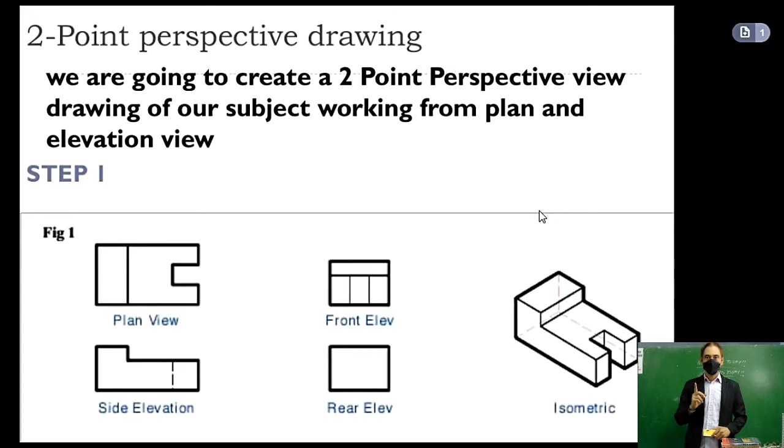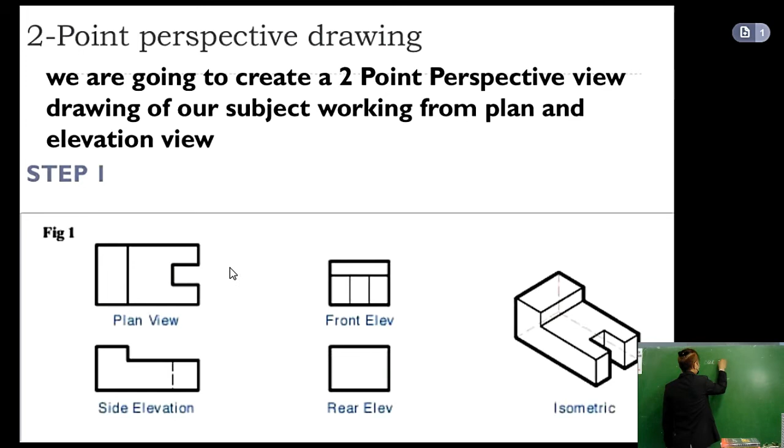Our topic for today is about two-point perspective drawing. We are going to create a two-point perspective view drawing of our subject working from plan and elevation view. Okay, so here are the steps. Step 1, we have here the plan view, side elevation, front elevation, rear view, and the isometric.

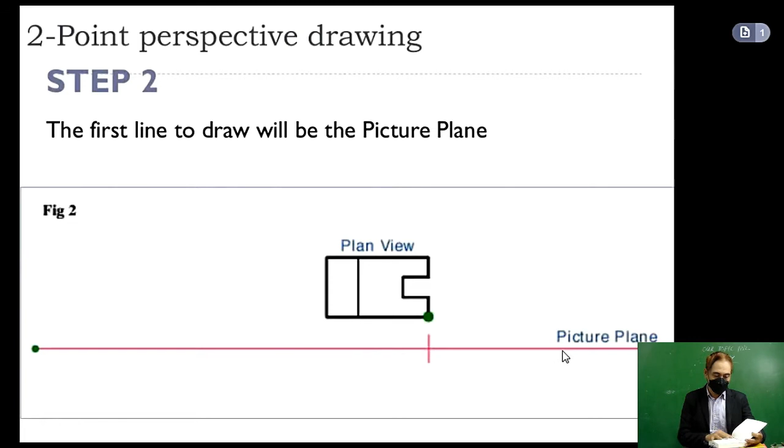Two-point perspective drawing, step number 2. The first line to draw will be the picture plane. Here is the picture plane in the pink line. And step number 3, place the lower right corner of plan view on the picture plane and rotate it clockwise. The choice is 30 degrees, arbitrary but should provide a good view.

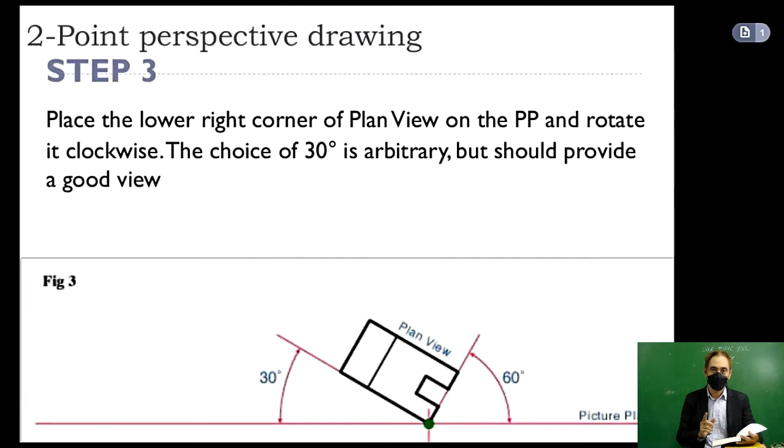So here is the 30 degrees. And the opposite side, it is 60. You should rotate your plan here. Okay. Now let's continue. Okay, now you draw your station point. This vertical line is called the station point.

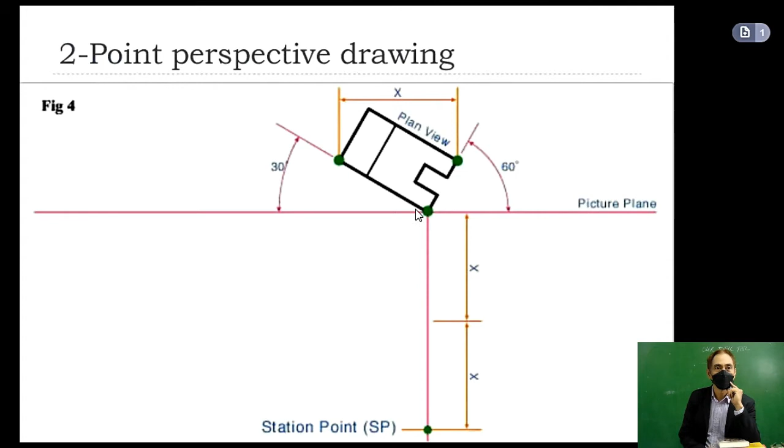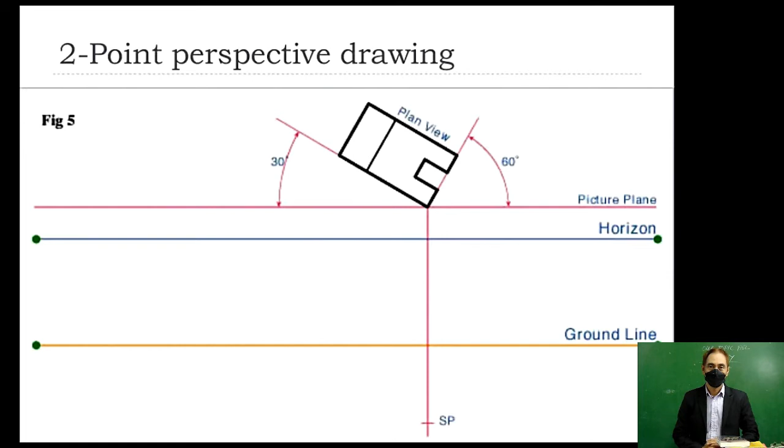And then you add now your ground line. This is color orange, and the color blue is the horizon. The ground line helps you where to put your perspective. Okay, so here is the ground line. So your side elevation must be put on top of the ground line.

And notice the station point. You will project a line going to the picture plane. That is 60 degrees, and 30 degrees going to the left. That is point A, and that point A will be projected down here in the blue, the horizon line, and this will be what we call vanishing point 1, and B projected down to the blue horizon line, this will be your vanishing point 2.

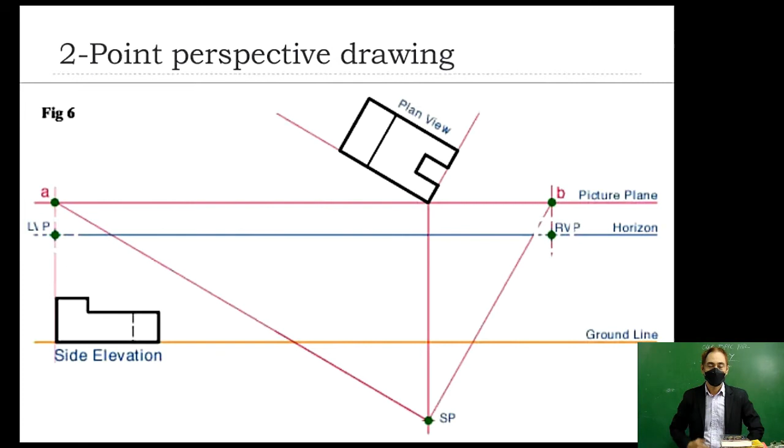Okay, listen carefully guys, it's now getting complicated. So the left vanishing point is vanishing point 1, and the right vanishing point is vanishing point 2. LVP is vanishing point 1. Now it's time to project your side elevation into the station point here.

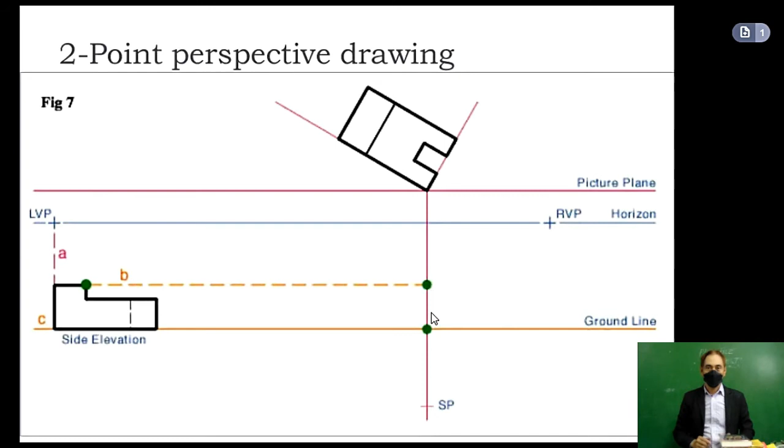And then the height, notice the height of this is equivalent to the height here in the elevation. And you will project that to the LVP or vanishing point 1. Same at the right, project 2 lines, orthogonal lines, to the vanishing point 2 or the right vanishing point RVP that lies on the horizon line. Okay, and let's go to the next move.

Now, lines are getting complicated. From station point, you project 2 orthogonals to point A, this corner, and to point B at this corner. And also project here in the perspective other orthogonal lines going to the left and going to the right. Now we can see almost clearly the view of the rectangular block right here guys.

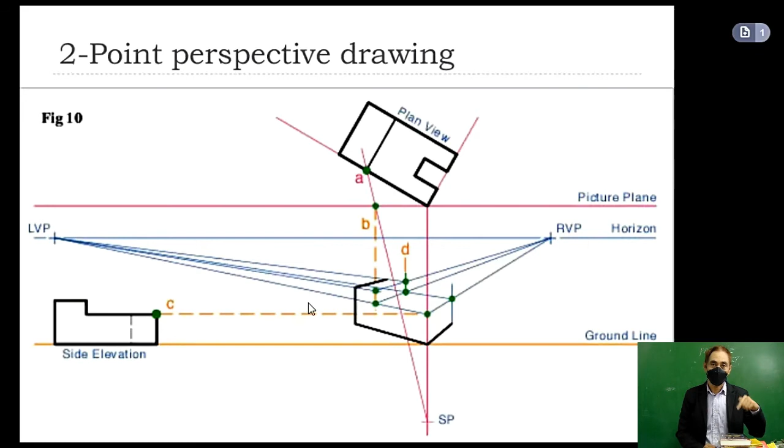Okay, now let's put corners here. And we subtracted a portion from the rectangular block to show what is the shape in this elevation. This looks like a letter L, so letter L here, like that.

Okay, now let's take a look at the plan view. There is a square part here, and that is open, and that will be projected going down here, so that your perspective object will have the same shape as the plan view or the top view.

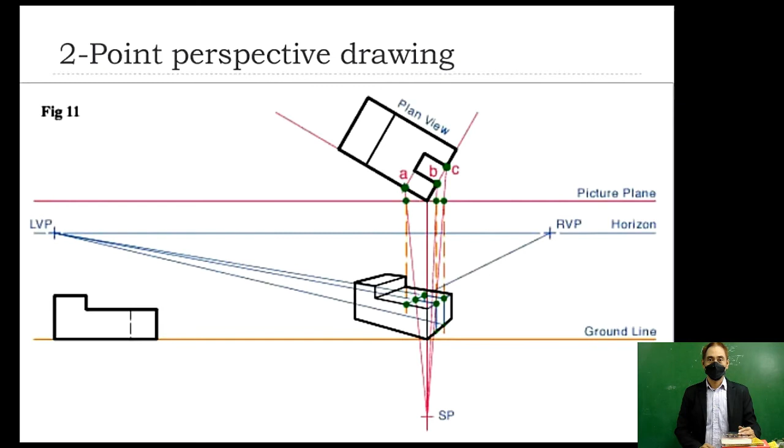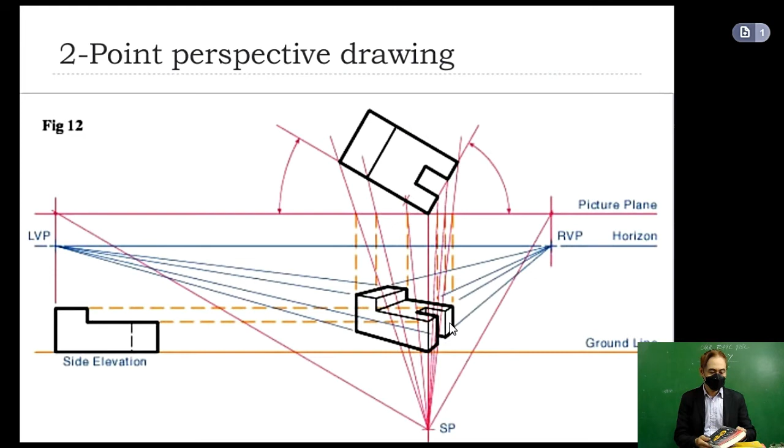Okay, so we're trying to locate the rectangular opening here as what we see in the letter B. Okay, so next step, now we are drawing object lines to show the real shape of the perspective object. Well, that's all for today about the 2-point perspective.